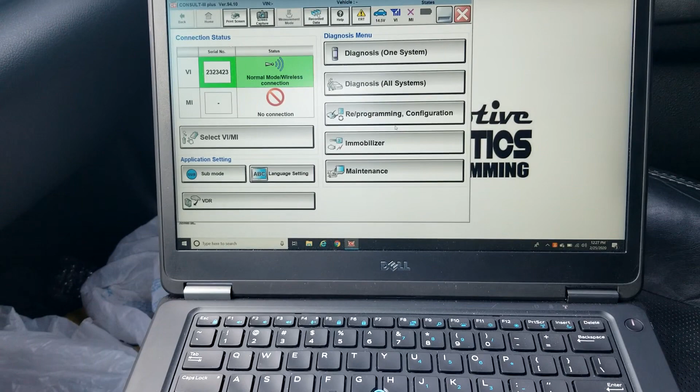So we're going to be using Nissan Consult 94.10. I think that's the latest version, I actually haven't checked this week to see if it's updated. So everyone always asks me, what aftermarket tools can I buy to do these CVTs? The answer is, I don't know. Every aftermarket tool I try has always missed the mark on at least one model. Maybe it works for a 2008, but it won't do a 2011.

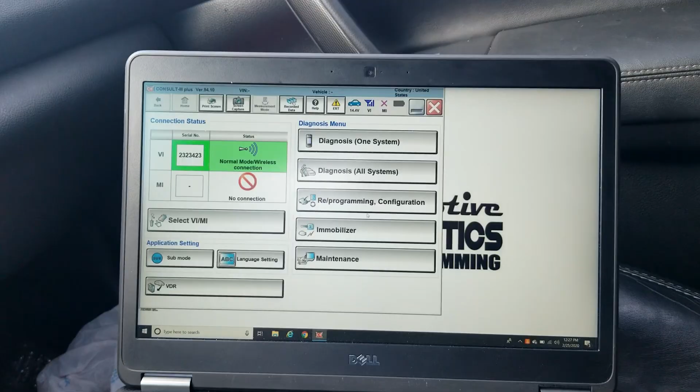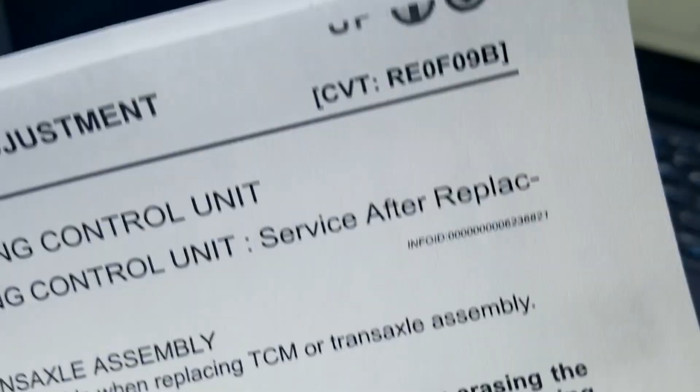Which kind of brings me to the next question I get asked a lot, which is, how do I do these? And all I can tell you is that every time I do them, I have to pull up the factory service info, because they are different for every year, make, model, and variation. There's about 7 different Nissan CVT transmissions. This one happens to be an RE0F09B. I've seen F10s, F10Ds, F11s. There's all kinds of different CVT transmissions. So I'm going to give you the rundown of doing this particular one, which is an 11 Maxima with a RE0F09B. So let's go for it.

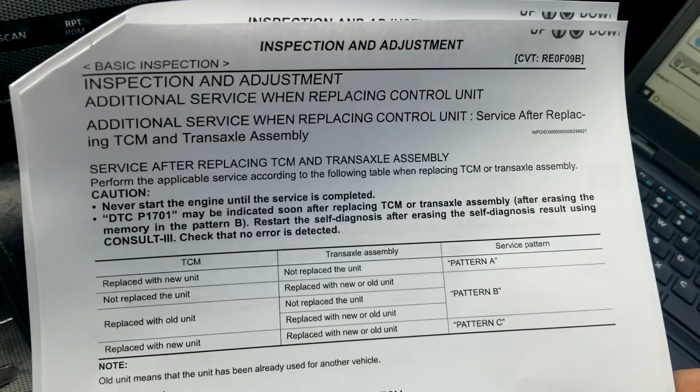So we pulled up the factory service information, got that ready. So basically the first thing we need to do, there's a chart on this one. If we're not replacing the transmission control module, but we are replacing the transaxle with a new or old unit, then we need to perform pattern B.

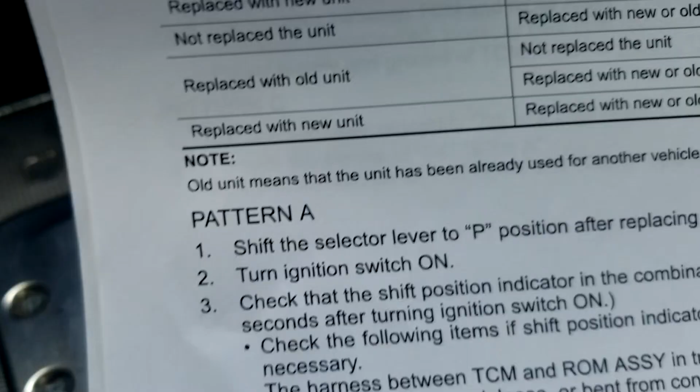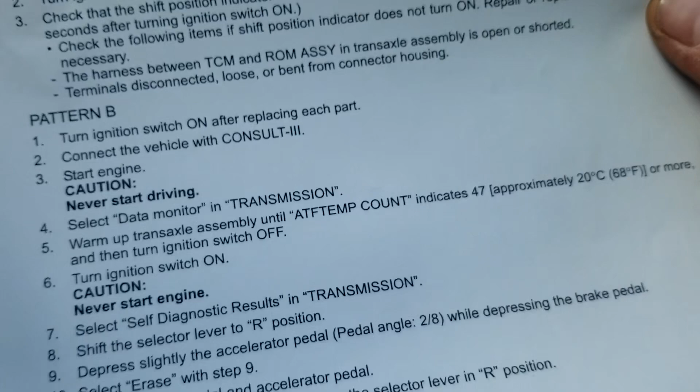So pattern B is turning ignition on. The car's sitting here running. Start the engine, never start driving. Select data monitor and transmission and check the ATF temp count, and it indicates 47, which is 68 degrees or more. And then turn the ignition switch off. So let's do that real quick.

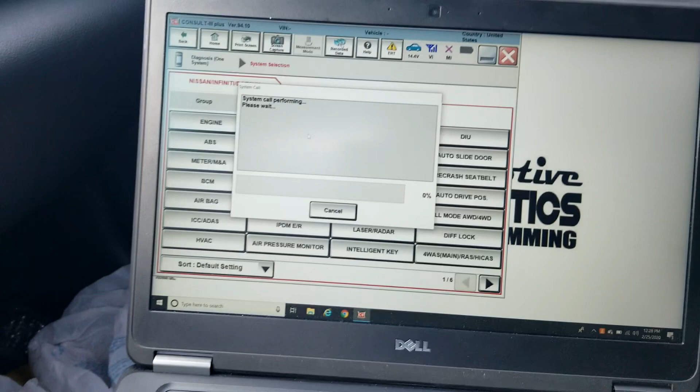Got Consult pulled up. I'm going to go ahead and go with diagnosis, one system. Go into the transmission, it's going to perform a system call. I don't know how long this will take.

But basically, this has a used CVT installed, one with hopefully lower miles, not exactly sure. The customer did opt to not perform any software updates, which I advised them they should do, but they did not want to. So we're going to wait for this to happen, I guess.

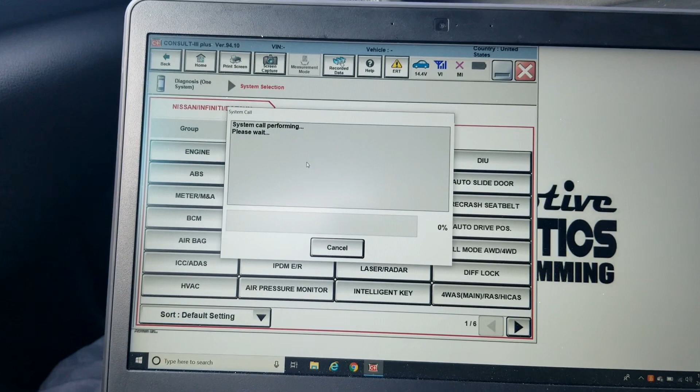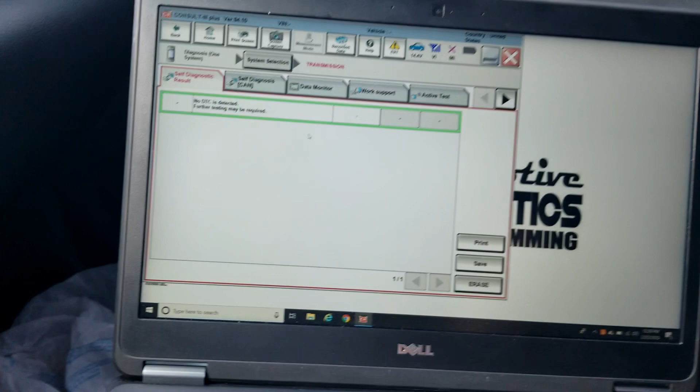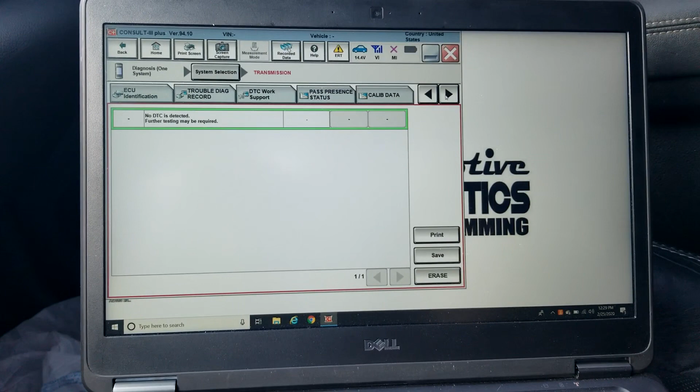That was quick. Alright, so we're in there. There are no codes, he told me there were no lights, no codes. He wanted to know why he shouldn't just ship it. I explained to him that the reason why we're doing what we're doing is because we want to make sure that the transmission control module has the correct data from the transmission in order to engage and disengage the pressure on that belt, so we don't prematurely wear it and cause shudders and total loss of the CVT.

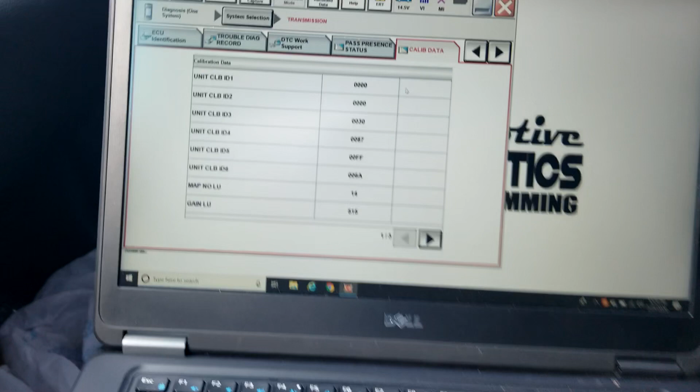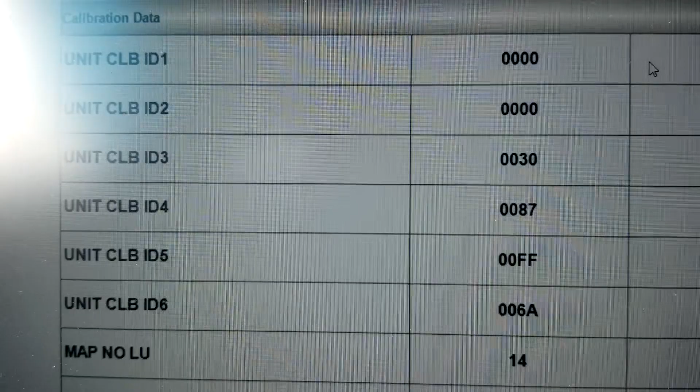So what I like to do first, check cal data. When I do that, I'm looking—this is the data that stores, these first 6 unit calibrators are what the transmission control module currently knows on how to shift the transmission that's installed. So these are the numbers, you'll notice if we take a quick note: 003087FF06A. That's the main thing we want to look at.

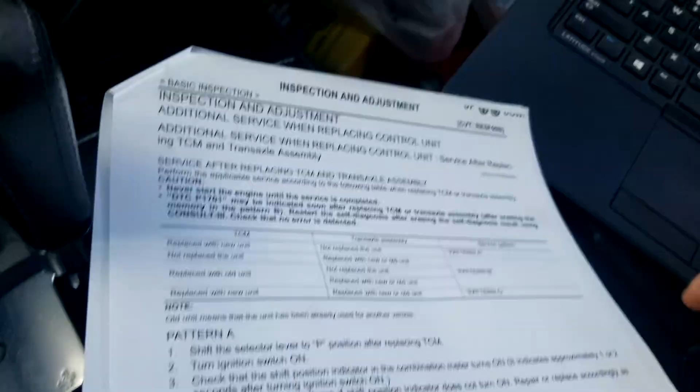So now let's perform this pattern B. Ignition on. So we need to go into, let's see here, and look at data monitor.

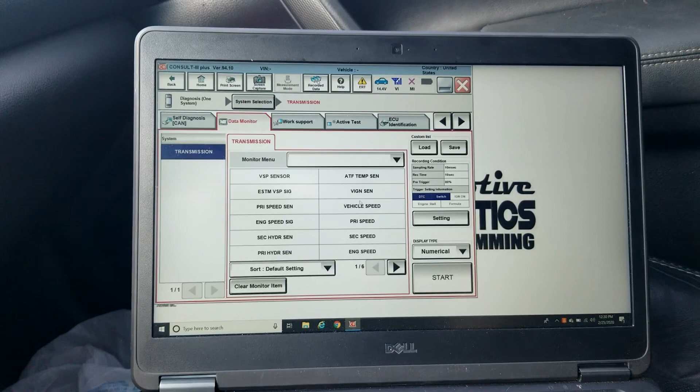We can clear all the monitor items. The Nissan factory scan tool is terrible to navigate. So there's ATF temp count, which is different than ATF temperature sensor. I'll put them both on there and show you.

Go ahead and click start, and we can see that we are at 73 and 1.78 volts. So our temp count of 73 is definitely more than 47. So we're going to go back.

I believe it says to turn the ignition off, so we'll turn the ignition off. Okay, transmission temp count, turn ignition off, turn ignition on... never start the engine. Too late.

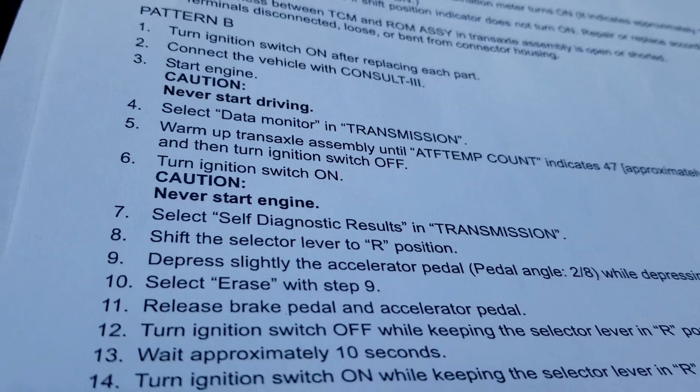We're going to go to self-diagnostics, transmission, shift the lever to reverse. So we're going to put it in reverse. Make sure that it indicates reverse on the dash. We're going to engage the parking brake so this car doesn't slide.

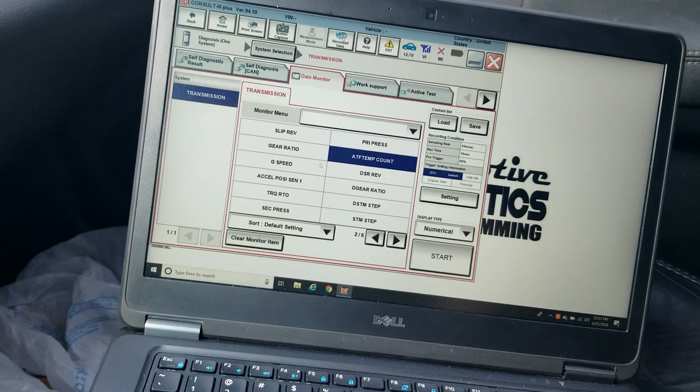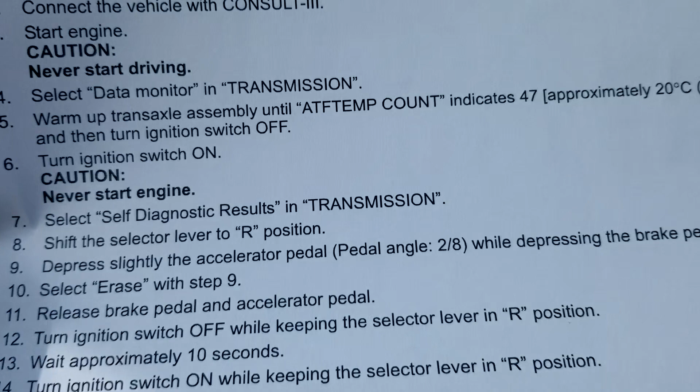What we're actually going to do is go to self-diagnostic results. Depress the brake pedal fully. And it says slightly depress the accelerator pedal, so 2/8 of depression. I feel like it's at 2/8.

Then it says to press erase probably. Press erase. Execute. It executed.

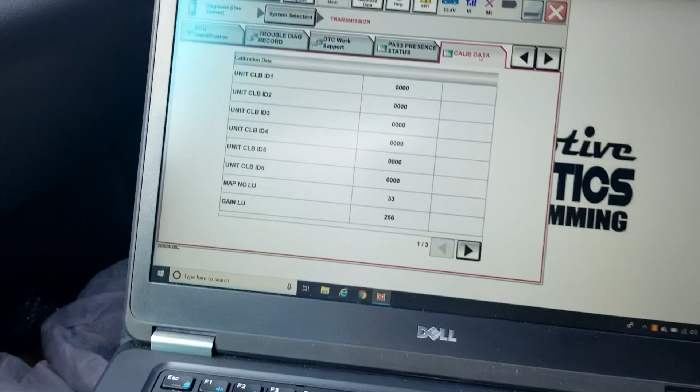Okay, now if we don't do anything else, before we follow the rest of the instructions like it says, go to cal data and look. You can see that they're all cleared out, they're all zeros now. Remember they were like a 30 and an 87 and an FF? That means we've told the transmission to forget how you know how to shift the transmission.

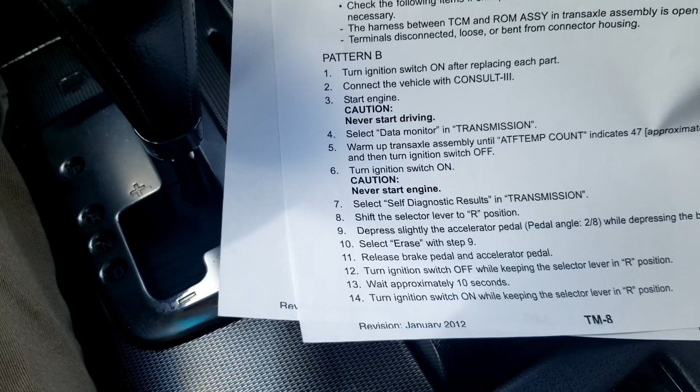So if we follow the rest of these instructions: release the brake pedal and the accelerator pedal, turn the ignition off while keeping it in reverse. Done that, ignition off. Turn the ignition on while keeping the selector in reverse, and wait 10 seconds while keeping the ignition on and the selector in reverse position.

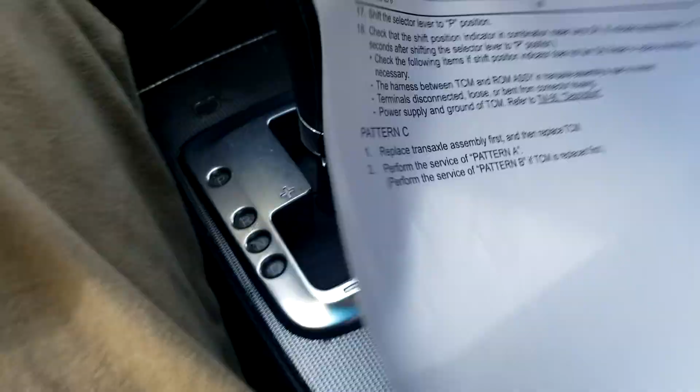Okay, so now it's about 10 seconds. Turn it on, go to the next page. Now it says check cal data and look for zeros. We got that, we're still there.

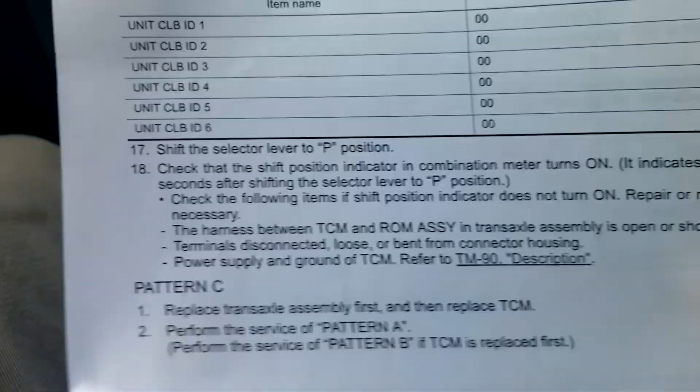Now shift the selector to park position. This is important here, we want to make sure that it actually says park up there. We did that.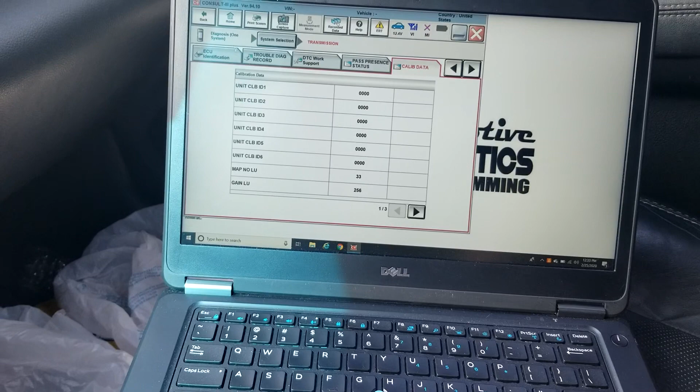And now if we look, we'll see that if we go back into this cal data and look, it will have stored the new cal data. So I'll show you. Go back here.

Self-diagnostic test results. Go back and let it reload the cal data now that we performed the function. And you'll see now there's different numbers: 30, A6, 20, B7, so the numbers are all different.

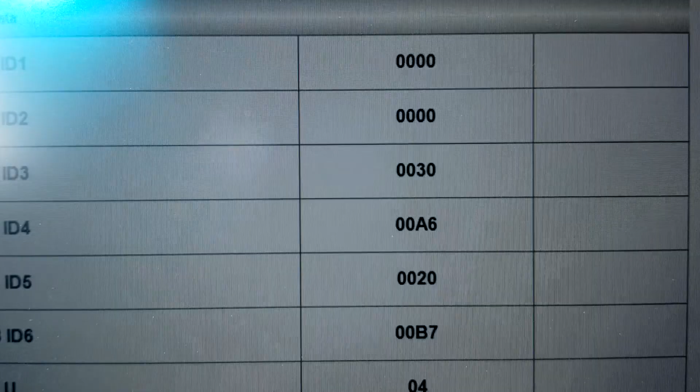So what it's done here, if I can hold this camera correctly, is we've basically told the transmission control module, forget how you know how to shift the transmission, reach out to the transmission valve body, acquire the cal ID data from the valve body, and then now the correct data is in the transmission. So if all goes perfectly well, there'll be no premature wear on the CVT.

Now, this is a CVT. I expect it to fail. Sorry, but that's just where we're at. So, that's it, we'll see you guys next time.

Guys, I hope you liked the video and learned a little bit of something. Like I said, there's a lot going on there. Even if the transmission has no codes and no lights, this needs to be done in order to properly extend the life of that metal belt that's in the CVT.